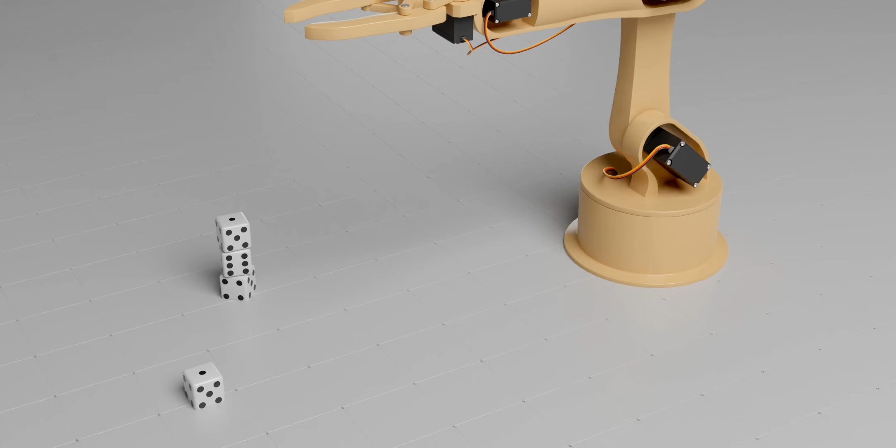Servo motors are very simple and handy devices. They have a very low cost and can be used in so many creative projects.

In this video, we are going to learn about hobby DC servo motors and how they work.

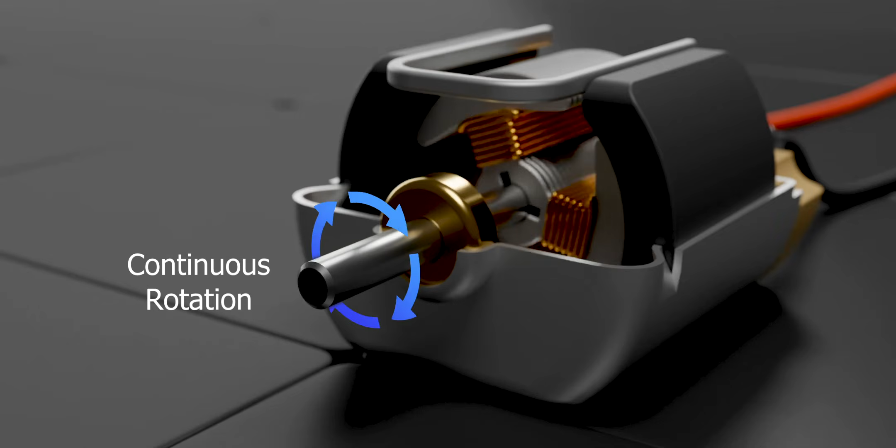Before talking about a DC servo motor, let's first understand what is a simple DC motor. A DC motor is a device which converts electrical energy into mechanical energy. A DC motor is not used for taking precise movements, as its only purpose is to produce continuous rotation. On the other hand, a servo motor is different. It provides precise control on the movement of its drive shaft.

Whenever you require a device that can take precise movements for your project, a servo motor might be the best choice. Internally, a servo motor is divided into two main sections: an electronic section and a mechanical gear section.

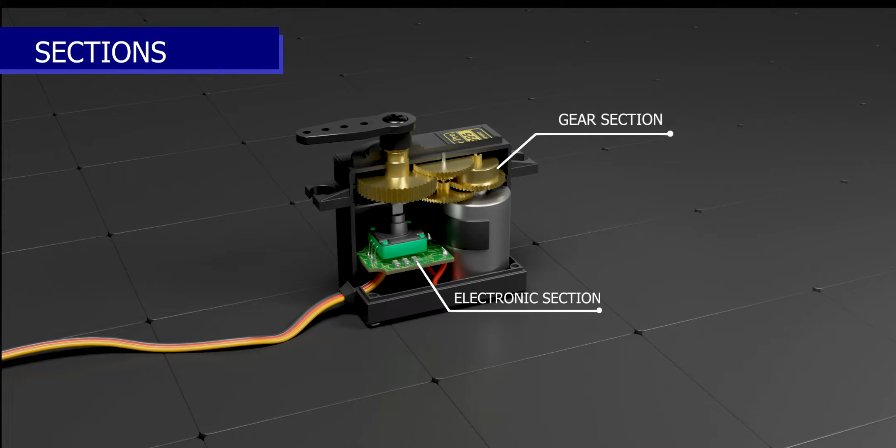Let's explore both sections one by one, starting with the gear section. In a servo motor, the role of the gear section is to produce a low-speed, high-torque output. Torque of a servo motor is the amount of rotating force a servo motor can apply.

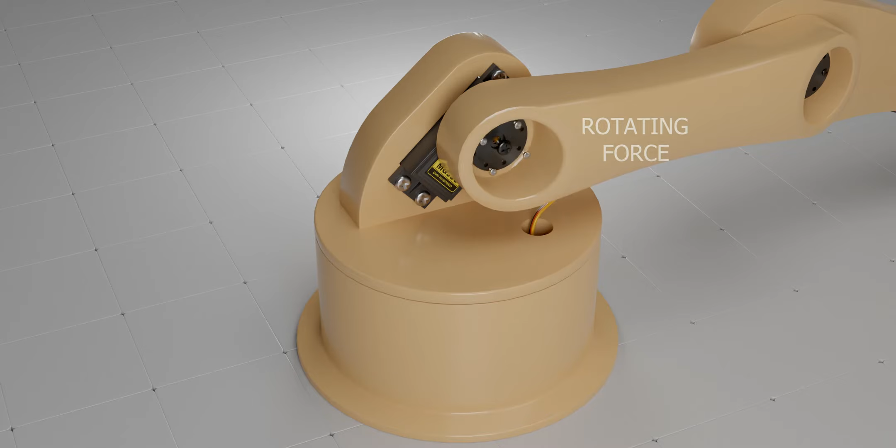The working of the gear section is based upon the principle of gear ratio. Let's understand the gear ratio. Imagine two gears, an input gear having 12 teeth and an output gear having 36 teeth. Now we can put both gears together to form a simple gear arrangement. This arrangement has a gear ratio of 3:1.

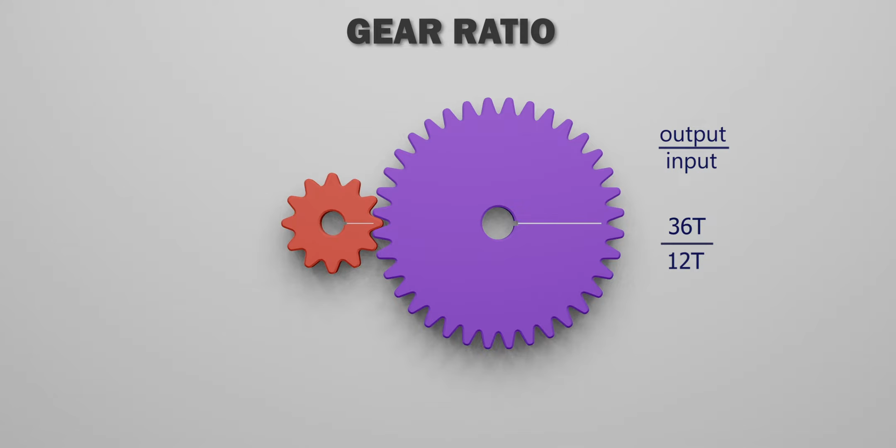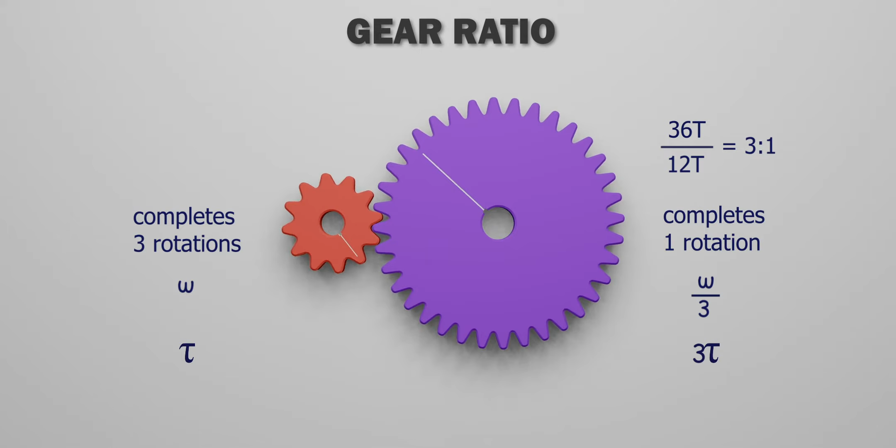It means for every 3 complete rotations of the input gear, the output gear takes only 1 complete rotation. Due to this, the angular velocity of the larger gear becomes 1/3 of the smaller gear. Also, the torque for the larger gear becomes 3 times compared to the smaller gear. And that's how a low-speed, high-torque output is achieved using a simple gear arrangement.

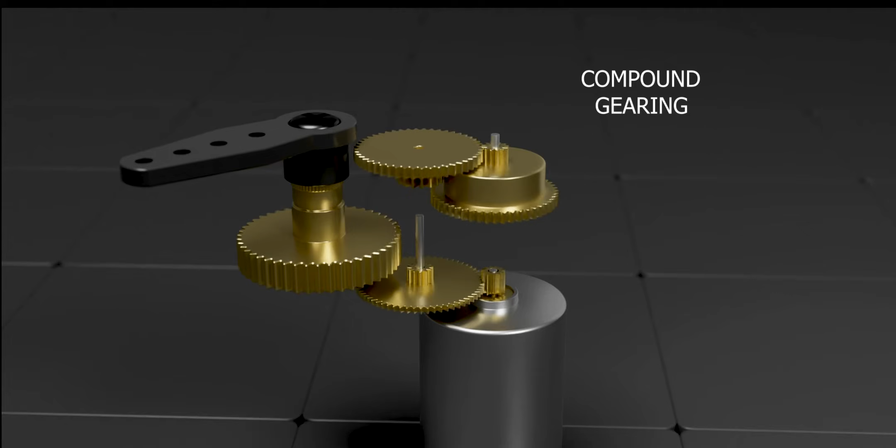The same concept is used in a servo motor. A DC motor is used for driving the gear section of a DC servo motor. In the gear section, the input gear in the motor is connected with a compound gear train. For this specific servo motor, the equivalent gear ratio between the motor and output gear is 260:1. It means whenever the motor rotates 260 times, the output gear rotates only once. Because of this, the output gear has a very low speed compared to the motor, but a very large torque.

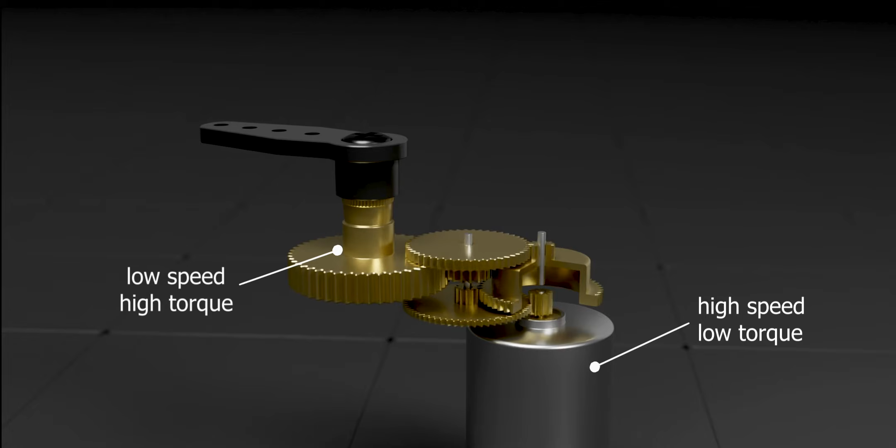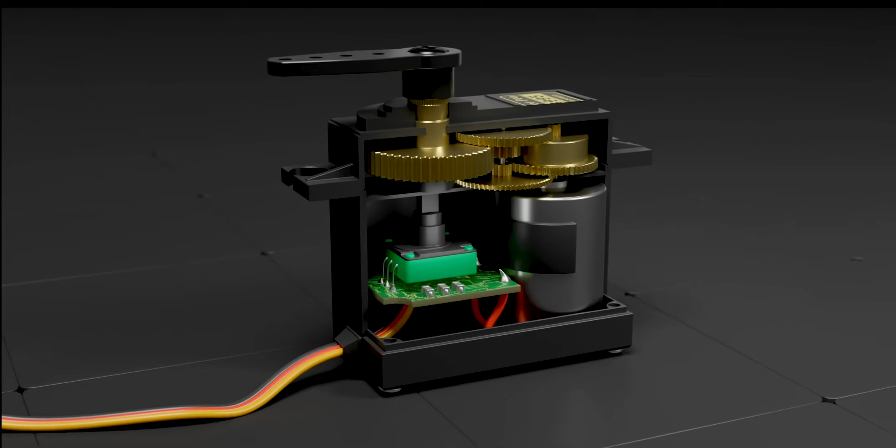The working of a servo motor is based upon the feedback control system. As we already discussed, a DC servo motor uses a DC motor for driving its output gear. Servo motors use a potentiometer as a feedback sensor. The potentiometer sends a signal to the PCB about the current position of the servo motor.

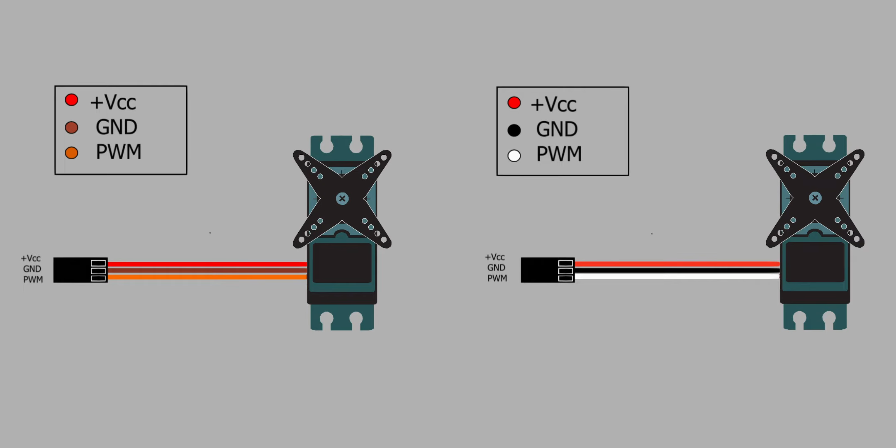A DC servo motor has a 3-pin connector. Generally, the red wire is for power supply, a black or brown wire is given for ground, and an orange or white wire is given for the PWM input signal. The rotation of the servo motor is controlled by a PWM signal. We will discuss PWM signals later in this video.

Servo motors work in a closed loop system. When input is given to the control unit, it provides power to the DC motor. As we already discussed, the motor is connected to the drive shaft using a compound gearing arrangement. The drive shaft is also connected with the potentiometer.

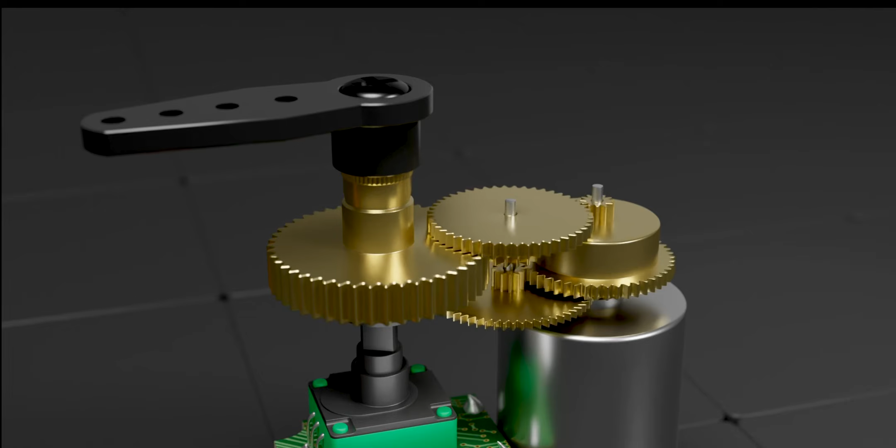Here, the potentiometer is used as a feedback sensor. It provides information to the control unit about the current position of the drive shaft. When the drive shaft reaches the desired position, the potentiometer sends a signal to the control unit to stop the DC motor. Hence, a closed loop system is formed. The position of the drive shaft is dependent upon the input PWM signal.

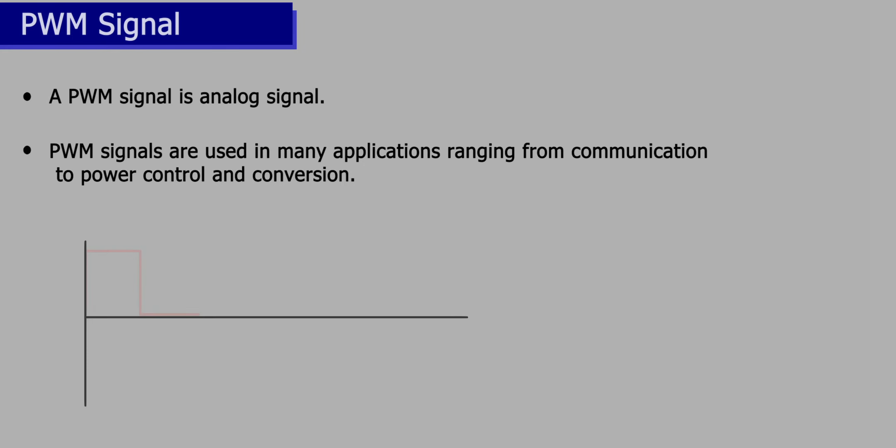Let's understand what is a PWM signal. A PWM signal is an analog signal, used in many applications ranging from communication to power control and conversion. A PWM signal is a series of repeated rectangular pulses.

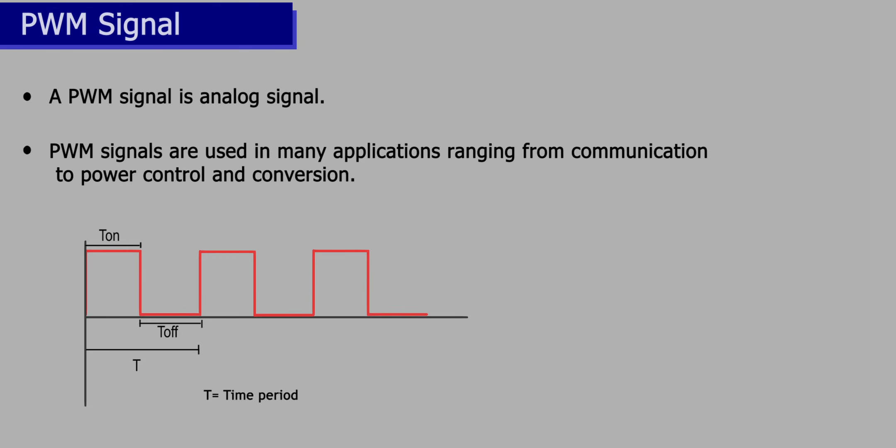Pulses repeat themselves after a regular interval of time, known as the time period of a PWM signal. The time period is the sum of its on and off time. On time is the time during which the signal is high; the signal is low during the off time. Most DC servo motors use a PWM signal with a time period of 20 milliseconds.

The position of a DC servo motor is controlled by varying the pulse width of the input PWM signal. When the input PWM signal has a pulse width of 1 millisecond, the servo is at the 0 degree position; 90 degrees at 1.5 milliseconds, and 180 degrees at 2 milliseconds. That means by varying the pulse width of the input PWM signal from 1 millisecond to 2 milliseconds, we can move the drive shaft accurately to any position between 0 and 180 degrees.

Generally, a DC servo motor has a limited range of movement from 0 to 180 degrees. Another type of servo motor is a continuous moving DC servo motor. The speed of a continuous moving DC servo motor is also controlled by varying the pulse width of the input PWM signal.

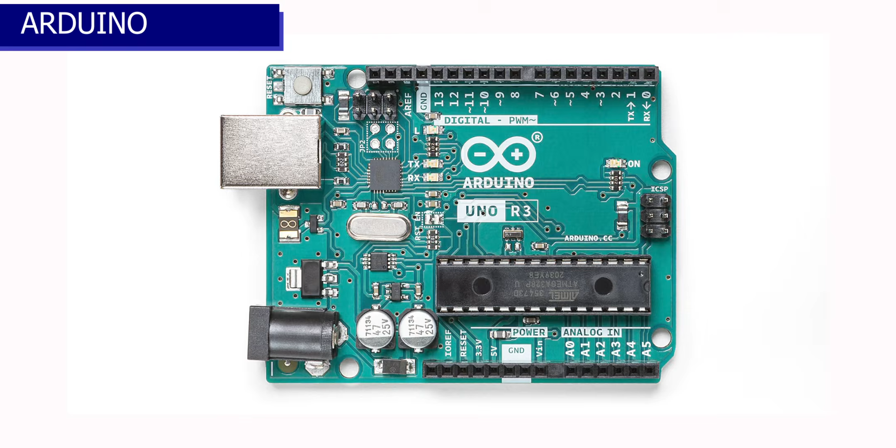PWM signals for controlling a servo motor can be generated using a number of methods, but the most convenient way is by using a microcontroller. A microcontroller like Arduino can generate PWM signals of any desired pulse width and duty cycle. Hence, we can easily control a servo motor by using a microcontroller like Arduino.